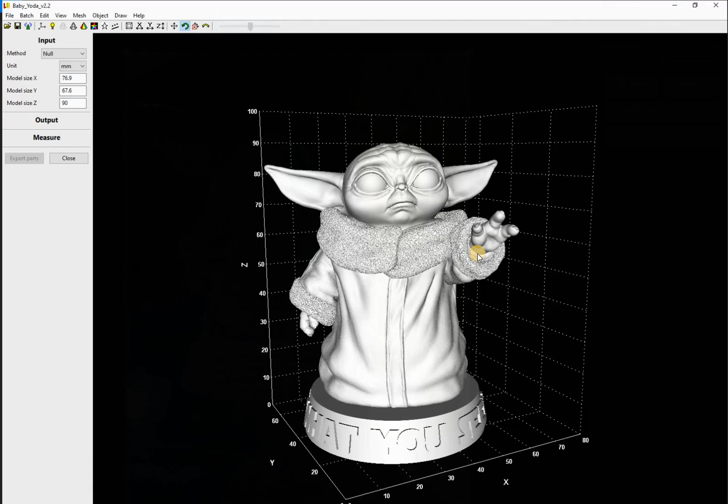Now what we're going to do is go into Luban and load the Baby Yoda. And there he is. Now if you look over here on the left, you'll see it says null. Well, that's pretty much just showing the model the way it is, size and the whole bit.

What we want to do is go down to wireframe. And after Luban thinks about it a little bit, it'll put something together for us. There it is.

Now on this side you can see you have X layer, Z layer, and you can give numbered values as to how many or how far apart they're going to be. There you see I had 60. I'll just put that at 10 for a minute. And it'll take it a while to make an adjustment. This always comes up whenever you change any value.

If you're not ready to save your model, go ahead and hit cancel and the effect will take place. Here you can see how the spacing of the lines worked out. I'm going to put that back on 60. And we wait a little bit. Say cancel. There we are.

This is the way I took it into Inkscape. That's the way we'll leave it.

I do want to show something here. We have this, look right there, it says boundary clearance. Now you can't see it on this model, and even if I'll take it to 8 you still won't be able to see it. But what that is, say you wanted to make this wireframe, and then you wanted to cut it out, well this actually puts the red line around it that can be read by the cutting program to do a vector cut.

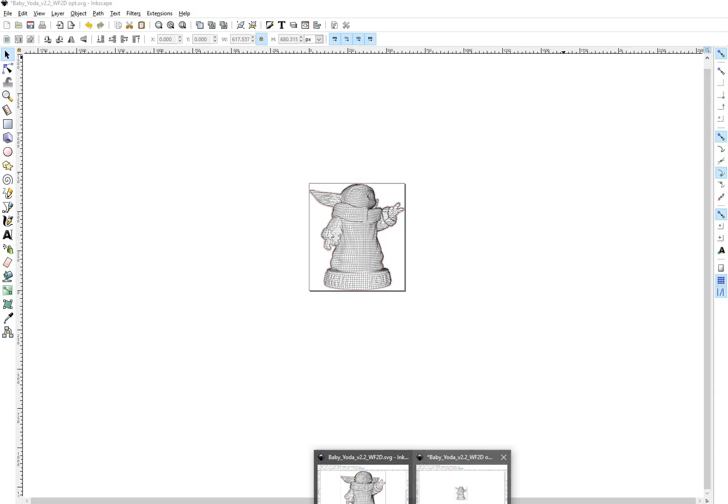So the next part of the project that we want to do is go into Inkscape. Here we are in Inkscape. You can see the red line that I was talking about. Pretty neat. If I'd have given it 10, it would have been 10 millimeters away. If I gave it 0, it would have been right up against it.

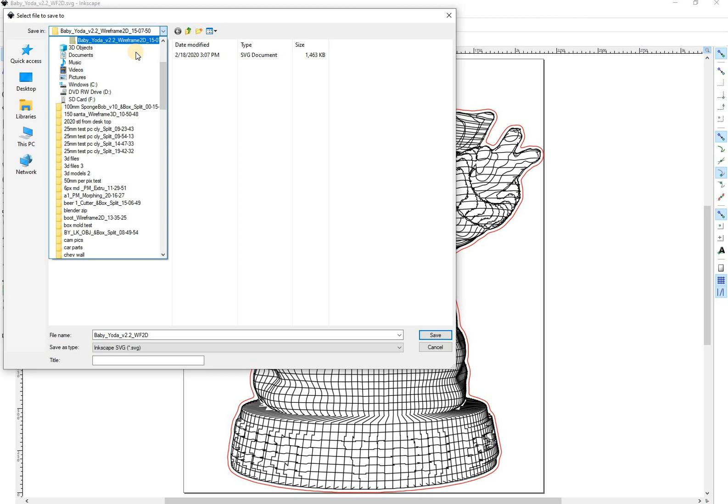When we save this file, we want to save it as optimized Inkscape SVG, not the default Inkscape SVG. We'll come down and find optimized, and once we save it as optimized SVG, we'll be able to work with that.

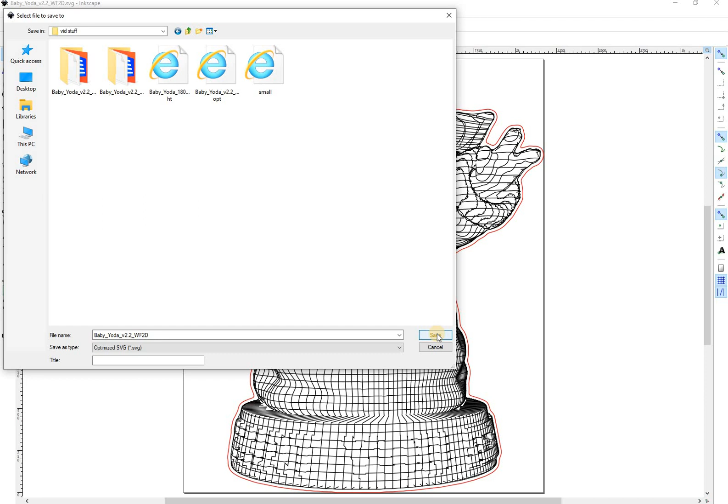Now I've already done that, so I'll just cancel it. But it would be in that folder, so I'm going to go in and open up that folder, Baby Yoda and OPT, my abbreviation for optimize. We'll open it up.

Now with it being optimized, we can select the entire scheme here, the whole everything, even though it's still an SVG. We're going to come up here and go into millimeters.

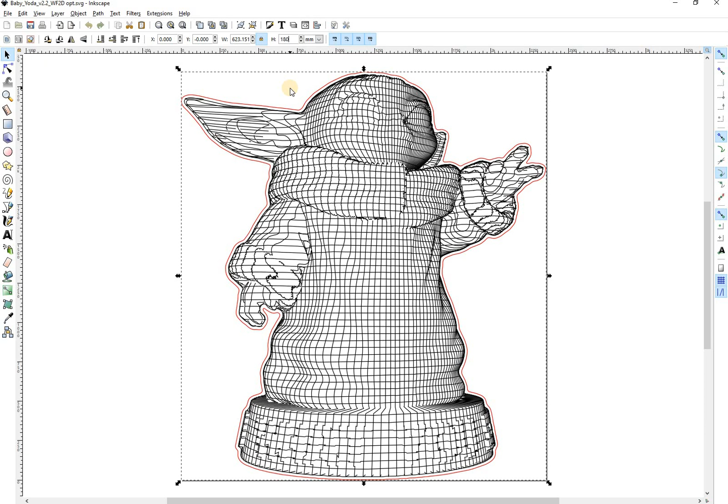We're going to change the size. If you notice up here, it's got that little padlock. Always click on that, turn it gold, that way it'll change the width and the height at the same time. To make it fit the class I have, I'm going to change that to 180 millimeters, and if you notice, when I hit enter, it'll change the width and the height. We'll bring them back up.

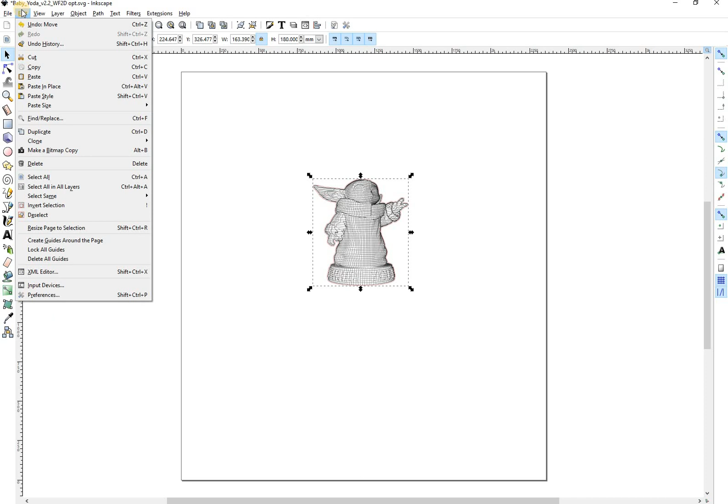Now we're almost done. One thing you can look here, you'll see the page is still way out there, and if you throw it into a program, it's going to take up space. So the one thing we want to do is go into Edit and resize page to selection. Now you have it, the page is fitting the model.

So when we go in and save it, we can save it as pretty much anything that we want. We can do it as another optimize, or we can do it for Inkscape plain SVG. I'm not going to save it because I did this before and it's already there.

The next step we're going to want to do, of course, is go into K40 Whisperer. We're going to go into K40 Whisperer and do Open Design, and pick the file that the 180 resized unit or resized model was in, if I can remember what it was.

Here we can see Baby Yoda 180 height - HT is my abbreviation for height in that case. It's loading into here, and we'll see once it loads. Now here it is, it's ready to send to our laser.